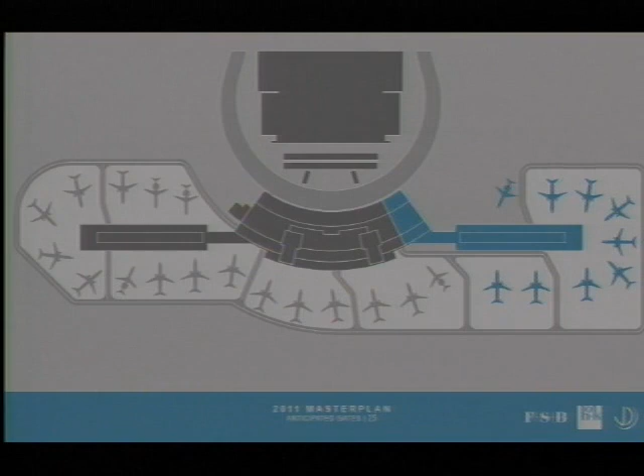Just for orientation, this slide you're all very familiar with, it's basically the terminal project. We have a west concourse, and we have the cargo building to the east. A bit of history on the project: the 2011-2012 update to the master plan called for an expansion to the west of the concourse, anticipating a 30-year horizon with 25 gates. That laid the foundation for our project, which also has a 30-year horizon, showing two phases with an anticipated 28 gates. There are particular goals to our project, as the director mentioned.

It's primarily a capacity-driven project, meaning, simply put, we want to have as many gates as we can, and our interpretation of that is to try to get as many in the first phase as we can. So we have 4 gates instead of 3, and we've been able to add a few of those amenities.

The second goal is to improve the passenger processing as well as the guest experience as we travel through the airport, and I'll get into some of the diagrams about that. Thirdly, one of our main goals was to improve and enhance the airport operations and expand their capabilities by some consolidation in some of those items there.

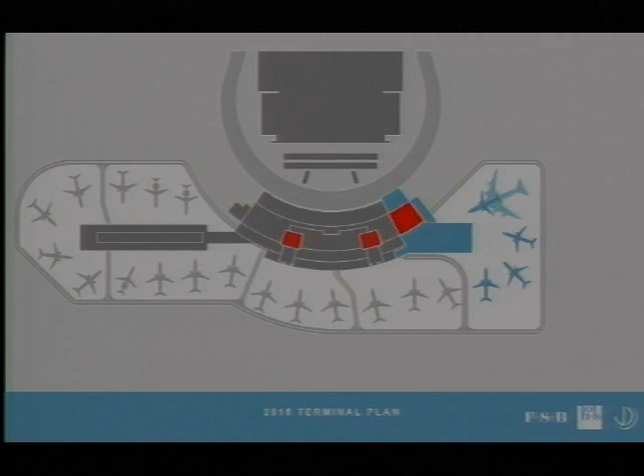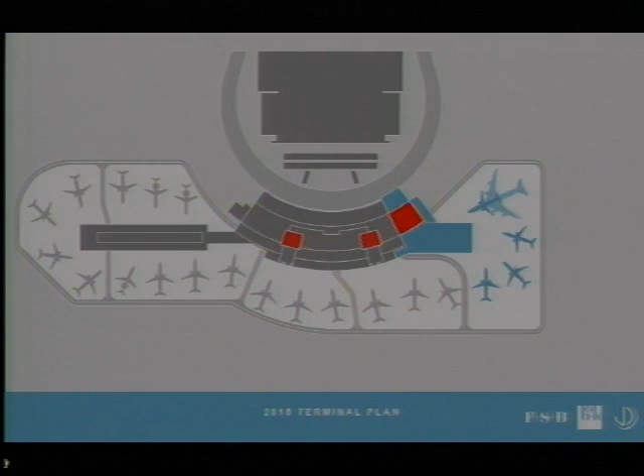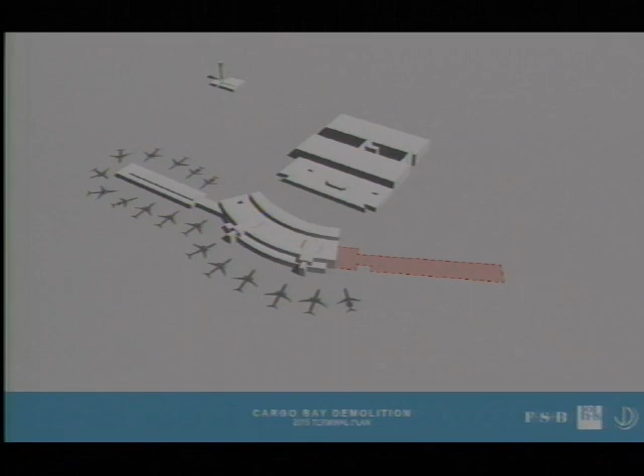We have this diagram to show you that this is not an easy project to deal with, and we wanted to point this out as one of the barriers to the project as we see it. I'll tie this back in with a little bit of the schedule and getting into some of the way that we plan to approach this project - the demolition of the cargo building, the moving of the tenants that are in there as well. So I wanted to just show this diagram to explain the process later down the road.

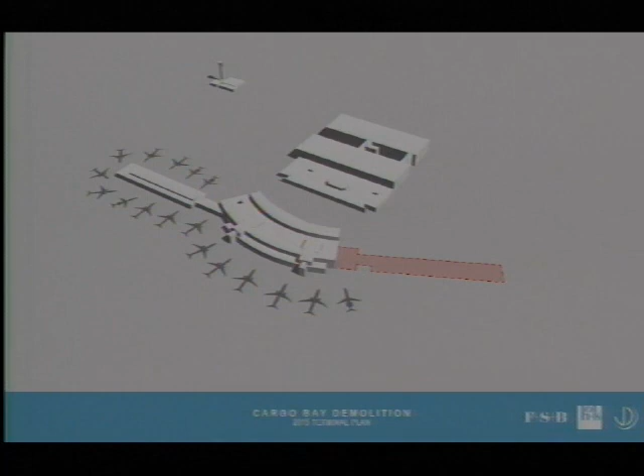Now, going through the programming and planning phase of the project, one of the things we looked at was whether to provide a 3-gate or a 4-gate concourse. And it was decided that 4 gates were preferred. Those are shown in blue on the plans.

This allows for the new concourse to have 3 leased airline gates and 1 airport gate. The airport gate connects to an international diversions hold room, which allows the airport the opportunity to provide an improved service to diverted passengers on international flights coming from nearby international airports. It reduces the risk of breaching the Department of Transportation ruling on the amount of time that passengers can be held on an aircraft.

The other opportunity with the airport gate is it meets a project goal in that there's a potential for it to provide the accommodation for regular future international traffic into Will Rogers World Airport. With this, there's the opportunity to create a shell space that has the potential to be a future Federal Inspection Services facility.

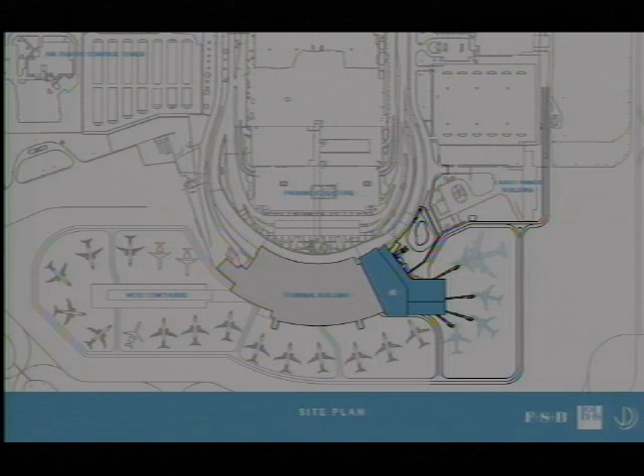Looking at the ticketing and departures level, the main components of the project are the 3-bay expansion to the east of the existing terminal, along with a support core and circulation core. The 4-gate concourse, which is slightly wider than the current concourse to accommodate the sterile circulation corridor on the north side and slightly deeper hold rooms for improved passenger service.

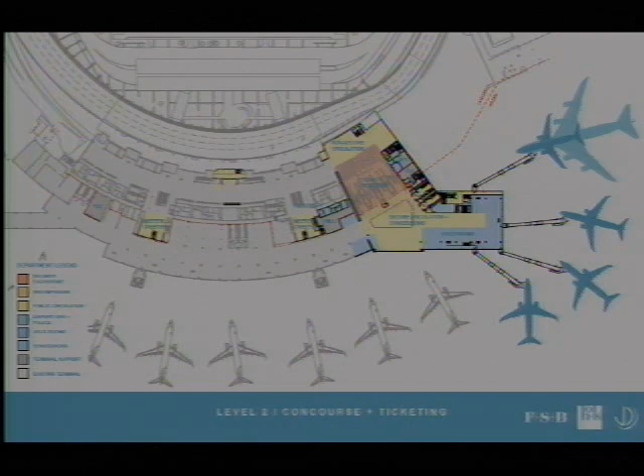The existing TSA security checkpoints are being converted into greeter lobbies and a TSA support space. And the elevator currently located in the circulation zone of the departures hall is being relocated to improve passenger flow on the way to the new consolidated checkpoint.

Now, in designing this level, the double height space of the departures hall circulation zone is continued into the 3-bay expansion and above the security search queue area. The security search checkpoint is designed as a column-free space for ease of circulation and equipment layout, both now and in the future as the TSA's equipment needs change.

On exiting the security - back up a second - the security checkpoint actually has 8 lanes currently designed with a potential to increase to 10 as needs demand by reconfiguring the space immediately to the west of the checkpoint. The 8 lanes meets the current and mid-term processing capacity of the airport, whilst the 10 will provide the capacity for the forecasted future throughput with full concourse build-out.

On exiting the security checkpoint, the passenger enters a generous recompose area that opens onto a daylit double-height volume that offers views out onto the airfield and of the aircraft, and also down the existing terminal and into the new concourse, thereby orienting passengers to their departure gates.

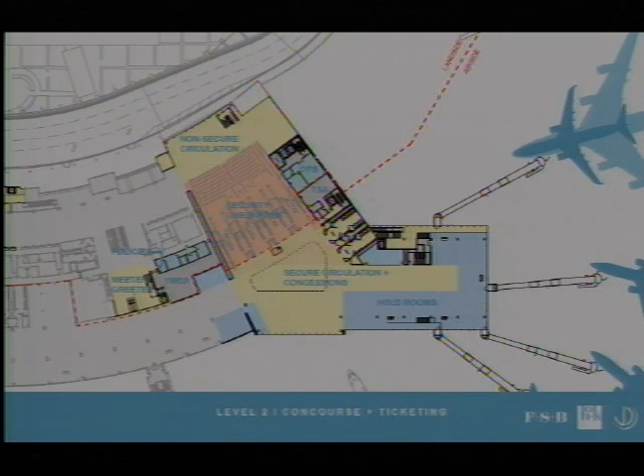On level 1, the main component of the project here are the 3-bay expansion shell space shown in orange. That is the potential future Federal Inspection Services facility space, and an international divergence hold room shown in blue.

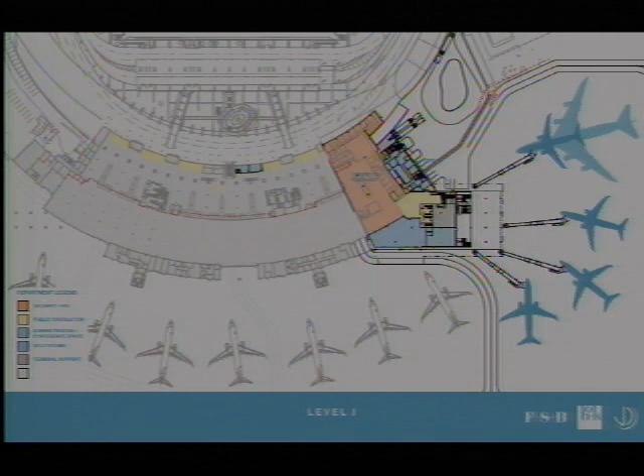We have airline support space, airport operations offices space, the relocation of the elevator from the baggage hall circulation zone, and the opportunity to provide seating in the rental car counter spaces that are going to be moved out.

So within the new construction here, we have the shell space for the Federal Inspection Services facility, and whilst this is shell at this stage, we have laid the space out in a preliminary fashion based on Customs and Border Protection's current space planning guidelines.

The International Divergence Hold Room is entered from a lobby that is connected to the sterile circulation system that connects to the airport gate at the concourse level.

Also at this level, we have the opportunity to bring the airport operations offices from the cargo annex into the support core here, thereby improving efficiency of operation by locating them closer to the badging operation while still maintaining airside access.

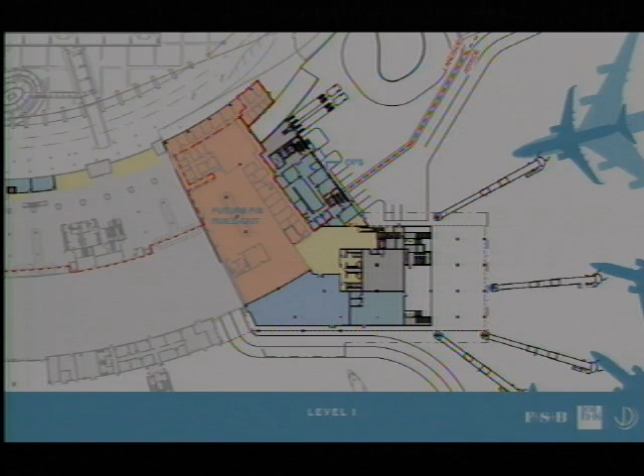On level 3, two functions here: the administration and conference center, and also the observation deck.

Now, whilst we were going through the planning phase with the airport, we found an opportunity to provide an observation deck that can be accessed from the non-secure side. Two access points are provided, one at the north of the departures hall and one from the east greeter lobby.

Now, the observation deck offers an opportunity for the public to view the airfield, also for those saying goodbye to departing passengers to view them on their way to the gates. And it also gives an opportunity for those meeting arriving passengers a place to wait should flights be delayed for any reason.

The administration offices and conference center is space that we can provide which is required for the expanding operation. This is located above the security checkpoint and connects to the existing administration offices.

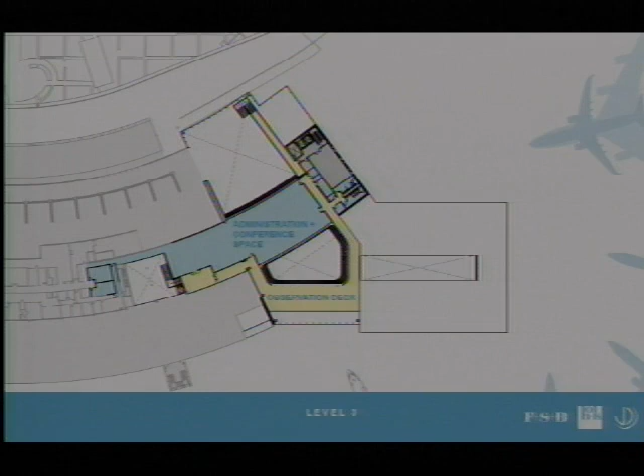Good morning, everyone. Thank you, Nye. I'll just walk briefly through the experience then that Nye was speaking to.

So if you look at the slide here, this is the east end of the existing terminal. This is essentially the view or the space that we'll be adding the majority of the security checkpoint and the lobby spaces that you've seen.

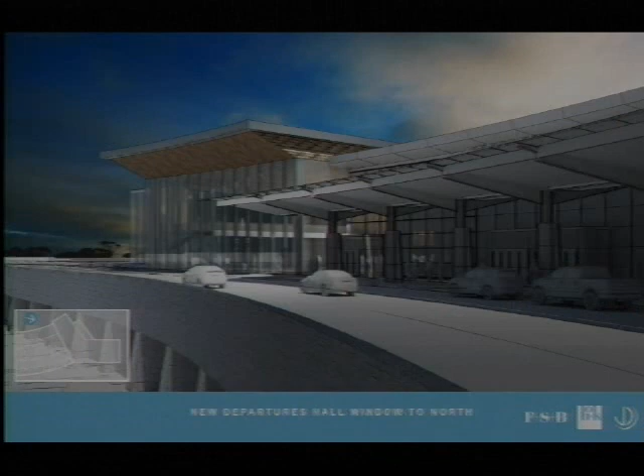So the experience arriving to this from the departures road really tries to become an exclamation point to the existing building. Due to the curve in the road, you can see this basically from all points as you arrive. And this will become the new center point, the new destination for somebody arriving at the airport.

We've got a big double-height glass fin-supported wall facing the north, bringing in ample daylight, and really try to express this as a glowing beacon.

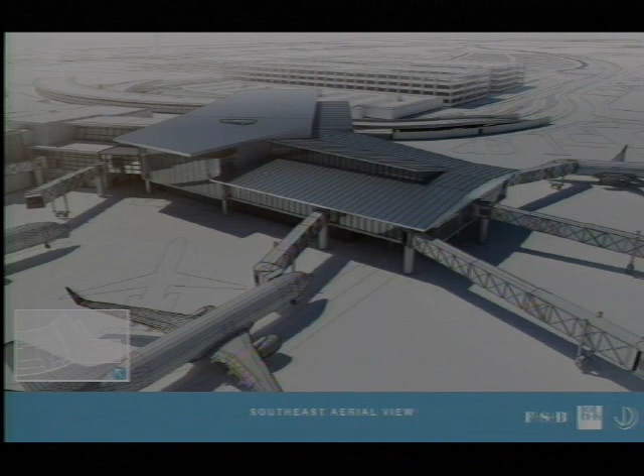As you move around in the aerial view here, you can see that we've gently transitioned the roof down from that point from the north. But as we do that, we're providing a clerestory space to bring daylight into the new circulation space of the concourse to the east.

The taller roof portion you can see to the north, facing the parking garage, is also mirrored again on the south with a large window facing the airfield. That's the large observation deck and recomposure and lounge seating area that faces outward. You can see the skylight in the center, which will bring daylight down to the center circulation space.

Looking at the south elevation from the airfield, you can again see the big panoramic window that serves the new lounge at the second floor, as well as the observation deck on the third. The lines of the hold room areas are consistent with the lines of the existing terminal and the west concourse, as is the clerestory bringing light in.

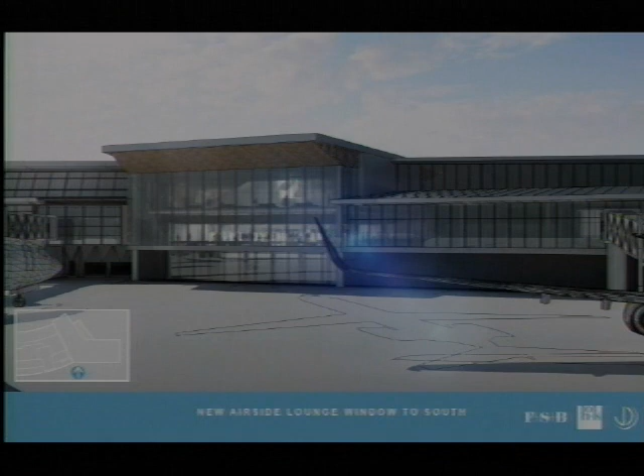Getting into the passenger experience, when you arrive into the ticketing lobby and eventually the security checkpoint, we're providing a very generous double-height space, consistent with the lobby, providing some termination for that. On the left of the image there's room for lounge seating, a chance to gather yourself before moving into security, but also highlighting that bridge connection that will eventually bring you over to the observation deck.

We've kept the materials consistent with the existing building, trying to use a natural palette of stone and wood, but really keeping it modern and highlighting daylight and views outward.

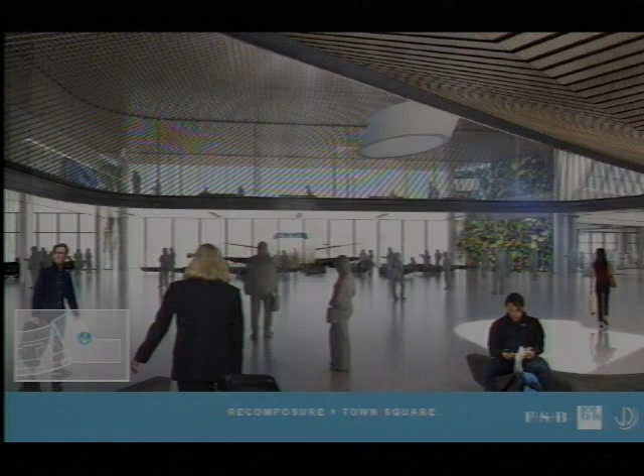As you move through security, it's really about refocusing you back to the airport experience. It's not about the security checkpoint, but about daylight and how you orient yourself to the gate, trying to get to the experience of being at the airport and making it exciting again. You can see the existing terminal off to the right, and the new gates would be off to the left in this image.

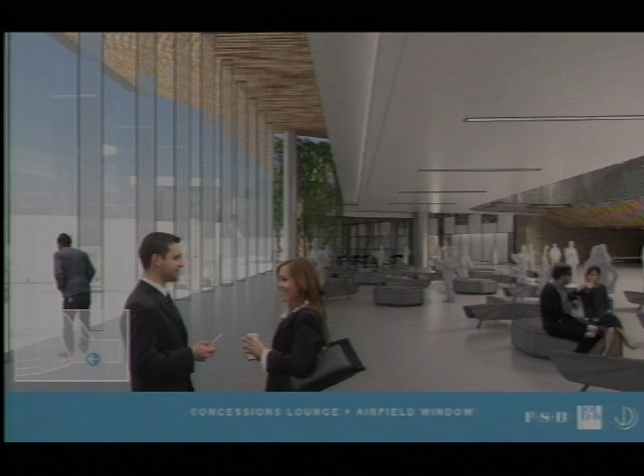Moving against the south wall, against the glass, we've kept that double-height space, with a very transparent glass wall consistent with the glass wall in the ticketing lobby currently, supported by glass fins. That allows passengers at the lounge space on level 2 and the observation deck to have a totally unencumbered view of the airfield. You'll notice we've got a deep overhang facing south, trying to keep as much sunlight out of that space as possible to keep energy costs low and to also reduce glare.

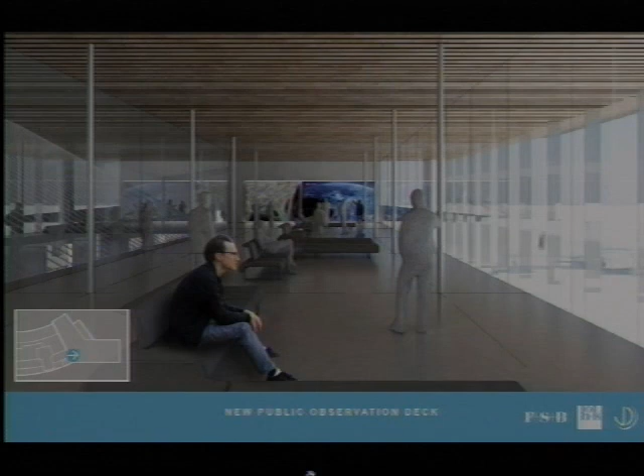Moving up into the observation deck, this is really trying to bring that public amenity back to the airport, and I think this is something very exciting that, in our experience, really doesn't happen anywhere else in the United States or the world for that matter.

Non-ticketed passengers can access this space and get a clear view of the airfield, but instead of looking down at your smartphone trying to see when your loved one's coming in, we're providing interactive artwork that will allow you to see weather patterns, flight patterns, and track the bigger network of flights across the country. That's on the east wall you're seeing there. So you can look out to the airfield, but also see an expanded view of how Oklahoma City fits into the bigger network of transportation.

From the observation deck level, this is now a chance to look down into the concourse, which is a very unique experience. Moving a few steps to the east toward the gates, this is really just to talk about daylight, circulation space, and concession spaces, trying to make it a flexible, comfortable experience for people arriving at the gates.

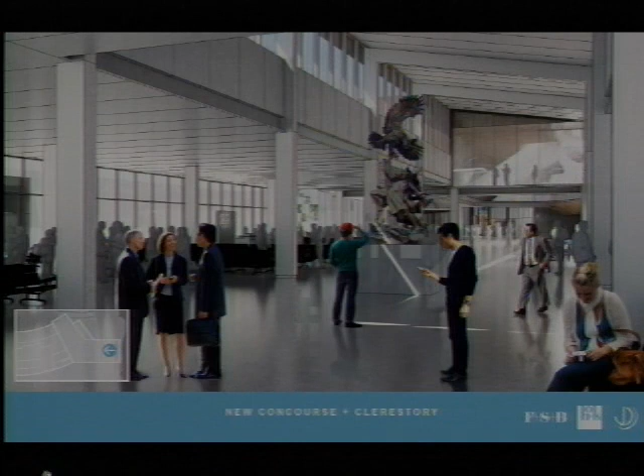And finally, when we get back to the end of the concourse, at the east end looking west, you can see in the background the recomposure and town square space. We've provided spaces for artwork. This is actually a sculpture that is in storage that could be donated at any moment, a nice bronze sculpture by artist Vic Payne. This is one of many opportunities where we can provide artwork, these very flexible spaces for passengers just to enhance that experience.

And again, just to look back, this is really one of those discoveries in the project. Once we added that public amenity of the observation deck, the ability to see loved ones off to the gate is really something that was kind of special about this. So I'll turn it back over to Mark and continue.

Thank you, Casey. I probably didn't do a good enough job early on presenting how excited I am about this project, but every time I see these renderings, it makes me smile a little bit. And I forgot to mention, a time gone by where people remember going to the airport and seeing their loved ones off, and I was thinking about that as I sit down and start going through the schedule and the budget, that I really wanted to convey how excited we are about this project and some of the great opportunities it's going to bring back to the community.

So with that, let's talk about where we are today and how we're going to get this accomplished. I want to go briefly over the schedule and stress the importance of where we are in the project. As Mr. Cranenberg mentioned, we're at 30%.

So we have a lot of meetings to go yet. We have a lot of stakeholders that we need to meet with - the TSA, the FAA, airlines. We have a lot of people and a lot of things to get through. Having said that, we've completed the 30% through the programming, planning, and schematic design phase. We're starting the design development phase, which we anticipate completing in the second quarter of 2016. And then we'll go into our bidding and construction phase, with anticipated completion in the fourth quarter of 2018.

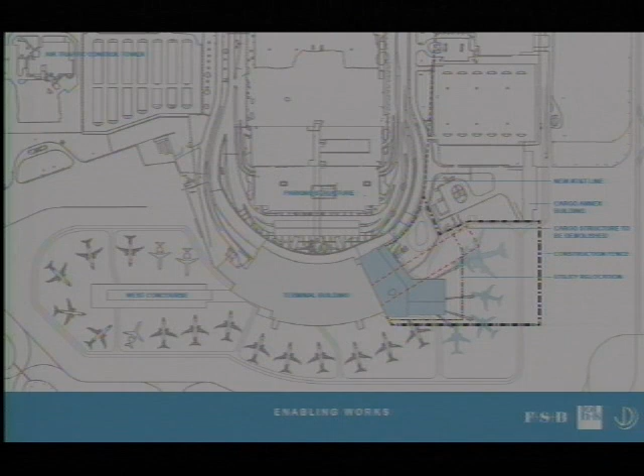When is Phase 2 scheduled to begin? That will be based on demand. We don't want to overbuild gates. We're working on a plan now to incorporate these new gates to actually have tenants in them, possibly even before we get new air service. But you don't want to overbuild, overexpend, and have outstanding debt that's not meeting demand.

Right, that really is a chicken and egg deal, and it's kind of hard. But we know we need to at least do these first few gates to increase gate capacity. Just the way this appears, Phase 1, to be constructed, how disruptive will it be to those new gates when you begin construction of Phase 2?

Well, we actually think because of moving it more to the east, it's going to be as less disruptive as it can be. There is a point where the buildings meet, and there is one gate at the end there. This is part of our strategy with the Enabling Works package, to minimize disruption to the existing operations in the area. So there is going to be some disruption, but we're going to be able to contain it outside normal operations.